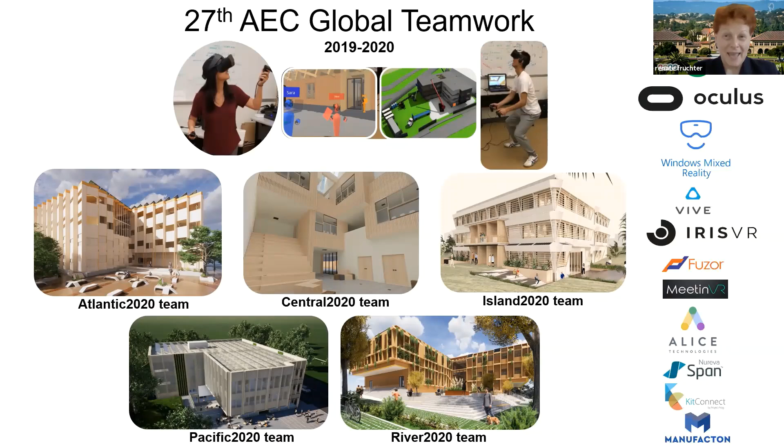Thank you, and hi everyone. Welcome to this presentation from us, as Renate said, Team Island. My name is Ronja, and I'm the architect of the team, joining from Aalborg University in Denmark.

Hello, everyone. My name is Simge. I'm studying at Stanford and originally from Turkey. I'm one of the construction managers of Team Island.

Hi, everyone. My name is Tian Long, and I'm also studying at Stanford University, and I'm one of the structural engineers in the team.

Hello, everyone. My name is Jakob. I'm from the Technical University of Denmark, and I'm a construction manager on this team. Hello, everyone, my name is Sebastian.

I'm one of the structural engineers. I am studying in Bauhaus University in Germany. Hello, everybody, I'm Nicolas. I'm the MEP engineer of Team Island, and I'm from ETH Zurich in Switzerland.

And this is our owner team, consisting of Paola, Hussein, Yuri, Miki, and of course, super owner Renate.

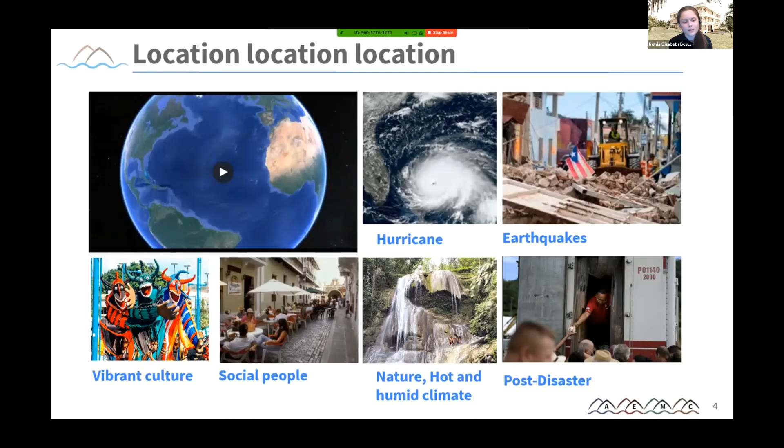We were asked to make a proposal for a faculty in San Juan, the capital of the Caribbean island, Puerto Rico. There were some key elements of our design: a tropical climate, outgoing and social people, being on an island which meant very limited access to materials, and lastly, natural hazards in the form of earthquakes and hurricanes, but also future risk of droughts.

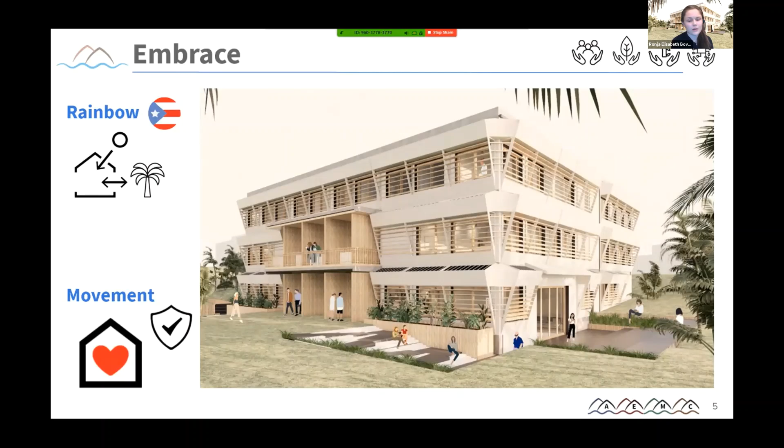All this we had to embrace, and of course also the challenges coming with it. And from this, our big idea, which is embrace.

We've designed a very open faculty with a large atrium in the center that would serve as a transition zone between the public and the private classrooms, but also to let light, air, and people move freely through the building. At the basement, we've implemented a living machine to invite nature into the building and blur the lines between interior and exterior in this naturally ventilated space.

Our way to embrace the Puerto Ricans was to design an open and modern faculty that doesn't only serve the students going here, but also the greater public. This is why we've located a cafe in the northern part of the building, very close to the main access and the road. So here you can get a coffee, and then go to the communal staircase and sit down and relax.

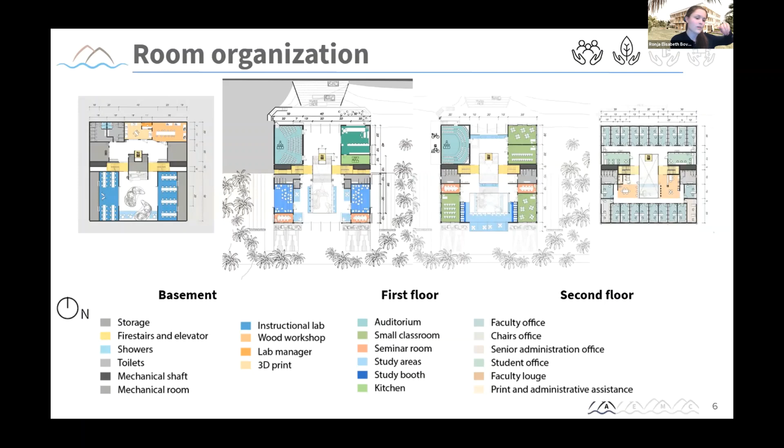My internet is slow, sorry.

On the ground floor, this is the very public floor. People are invited to pass through this atrium, and on the journey through the atrium, they can see what's going on above them and underneath them through the whole building, getting an idea of the life in the building.

We've also invited water into the building in the form of a human-made waterfall running down the glazed elevator in the center of the building. Lastly, you can see to the right that we have these two large classrooms that are openable towards the park, so that students can join the lectures both from the interior and the exterior.

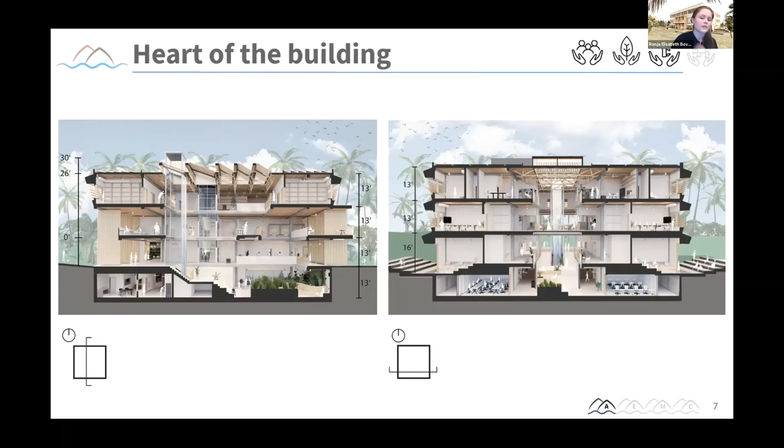In general, it's been a very important factor for us to create spaces for people to thrive in, and this is why we thought flexibility was a very important element. As you see, the smaller classrooms, for example, offer spaces for collaboration and lectures, and also workshops.

As I've already mentioned, we also introduced a makerspace to foster creativity and innovation. Here we have a wood workshop and also a 3D lab. This is not only offering students a place to try out prototypes, but also the general public a place to join workshops, for example.

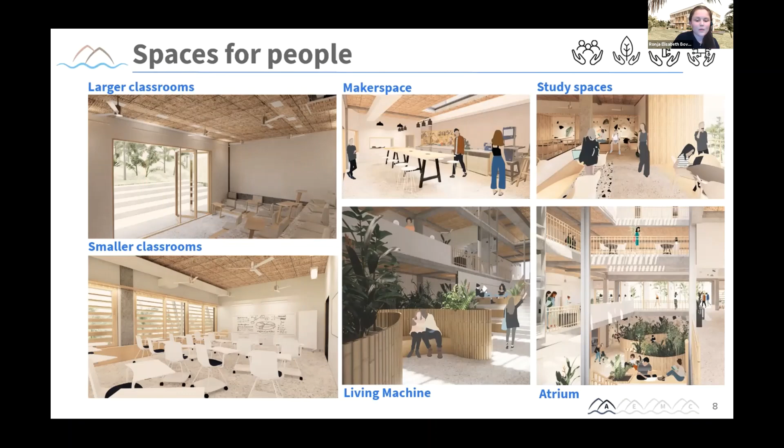The big atrium space also allows for strong buoyant airflow, which is very important since our most public open spaces are naturally ventilated. The enclosed workspaces, however, are mechanically ventilated and cooled.

For our HVAC system, we use small facade-integrated air handling units combined with ceiling fans. The system relies on an innovative comfort definition—high temperature and humidity, but with enhanced airspeed introduced by the fans. As most of the users of the building are engineering students, we showcase the integrated building systems and energy data.

And a ranking system to foster the conversation between them. For this, we created the concept of a frog race, with the goal to nudge students and faculty members to be more sustainable in their usage of the building. Every day, each room will enter a race for the most energy-efficient room, motivating users to adapt their behavior to beat other rooms, for example by utilizing less artificial light or wasting less water.

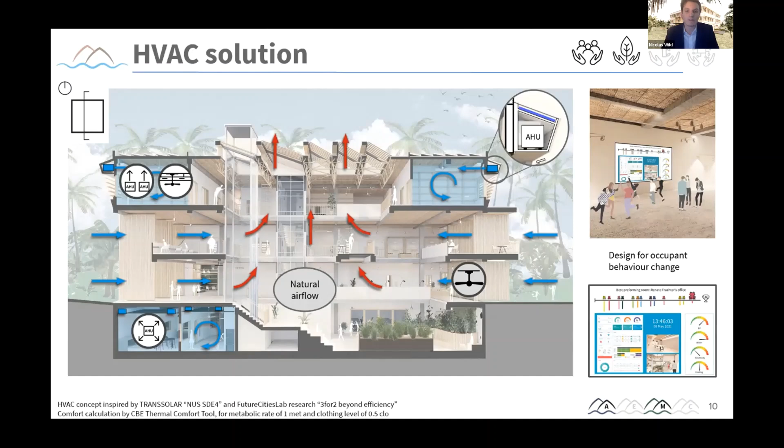We now want to explain how our building becomes net water and energy positive. On top of the roof construction, we have our PV systems whose power is stored in Tesla batteries. While part of the energy is used internally, we also provide energy to the power grid and to our integrated e-bike charging station. By this, we have a long-lasting impact on the greenhouse gas emissions of our whole surroundings.

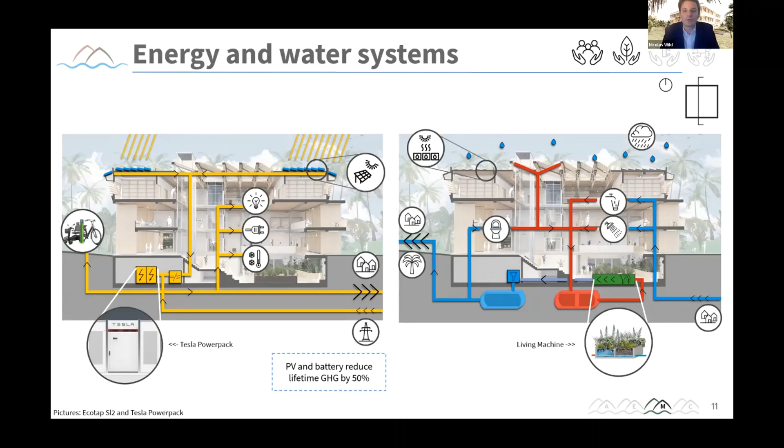The collected rainwater, as well as other wastewater from our building, is recycled with the help of our living machine system for reuse in non-potable applications, such as toilets. This allows us to serve other buildings with recycled water for toilet systems as well, minimizing water usage outside of our site. This water can also be used for landscaping, which will play a major part in future droughts, for example in conservation of the rare species of frogs or trees found on the site.

Now, knowing these spaces, structural engineers design a structure according to technical standards that can withstand the natural hazards typical of the island.

It's important to highlight that with the application of base isolation, the building is proven to be fully operational after strong earthquakes, as shown by nonlinear time history analysis.

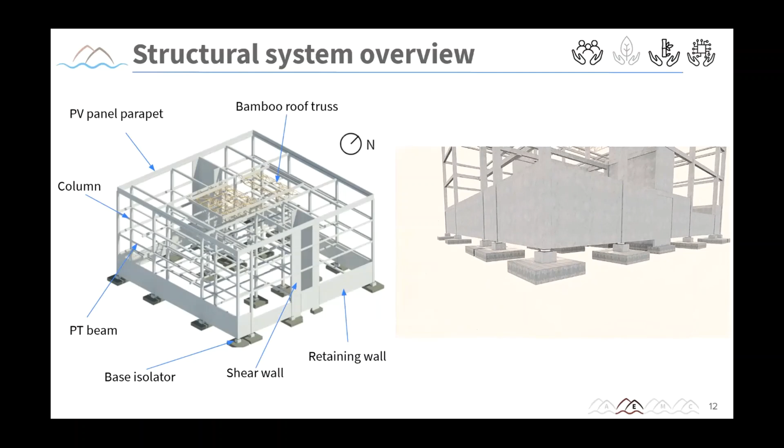Being on an island, material procurement and shipping is always challenging. However, the team found a way to utilize local material: bamboo. Non-structural elements such as partition walls and entrance doors were designed with bamboo. Structural elements like the roof truss were also parametrically designed with bamboo to give warmth and brightness to the whole ambience.

The animation at the top right corner shows how using bamboo contrasts with normal concrete beams and brings light to the building.

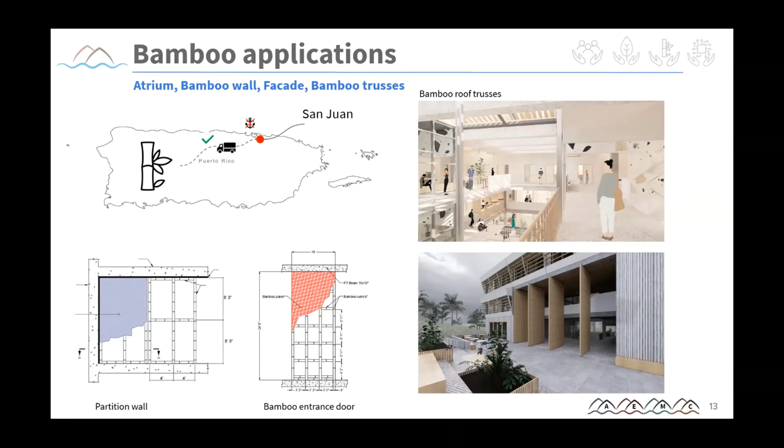Now for the facade, we also embrace local materials as a hazard response. For instance, the hurricanes and hot, sunny climate that Puerto Rico endures are addressed by creating space to include air handling units, louvers, and PV panels. The louver is made of bamboo to create a strong contrast to the visible concrete walls and to protect the glazing from projectiles.

Additionally, the sacrificial bamboo louvers are optimized for view and shading, and they can be prefabricated and easily assembled, which reduces cost in case of damage.

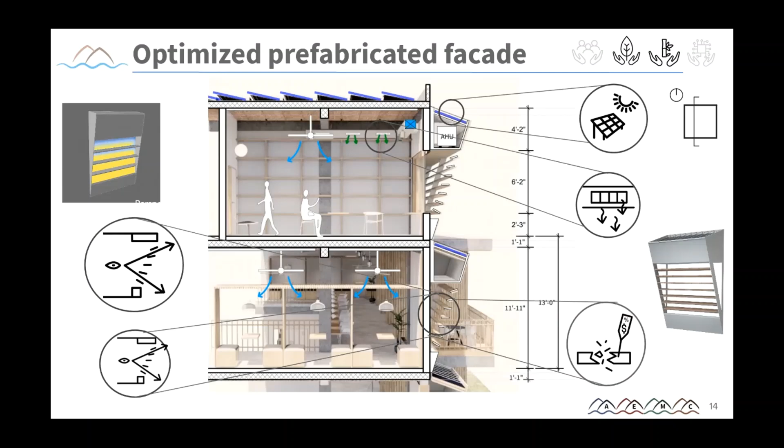Additionally, we seek for our building to go beyond its educational purpose and play an integral role in post-traumatic stress management and recovery of a population affected by natural disaster, serving as a relief site, supply depot, and communication center.

Besides hurricanes, earthquakes are another major concern. Just last Saturday, there was a magnitude 5.4 earthquake in Puerto Rico. Although earthquakes are difficult to predict, safety education should be emphasized prior to earthquake events. During an earthquake, base isolation helps minimize structural damage and keeps the building fully operational afterward. Then our building can help distribute necessary resources such as food, water, and electricity.

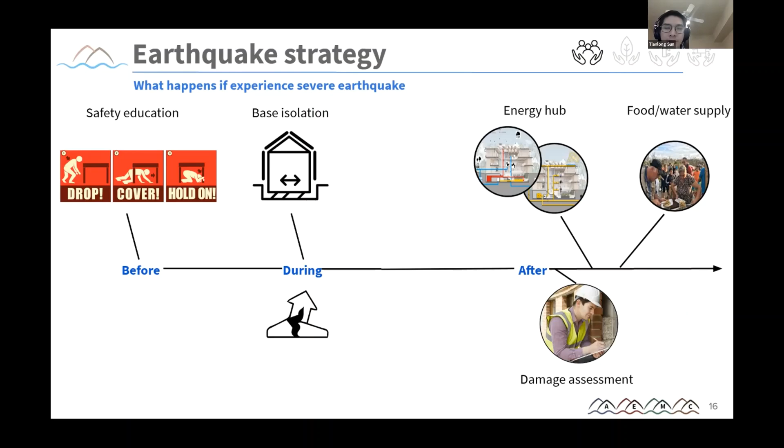Now it's time to plan how we build our design. To better plan our site work, we used simulation and virtually built our building. In this way, we could see bottlenecks and possible clashes that may occur on site, and optimize our 4D schedule by changing support relationships.

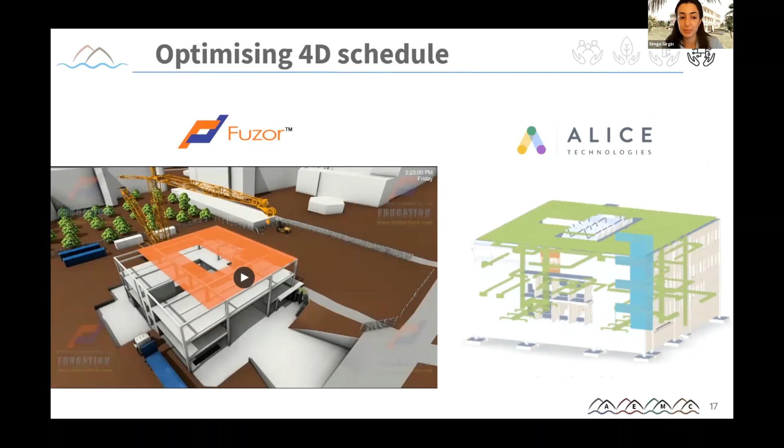On a critical day, such as peak workflow day, Fuzor simulation helped us coordinate construction crews and component shipments, which are essential for successful floor installation without colliding with on-site core wall construction. For example, we planned to install floor slabs in 3 zones to align installation with delivery frequency.

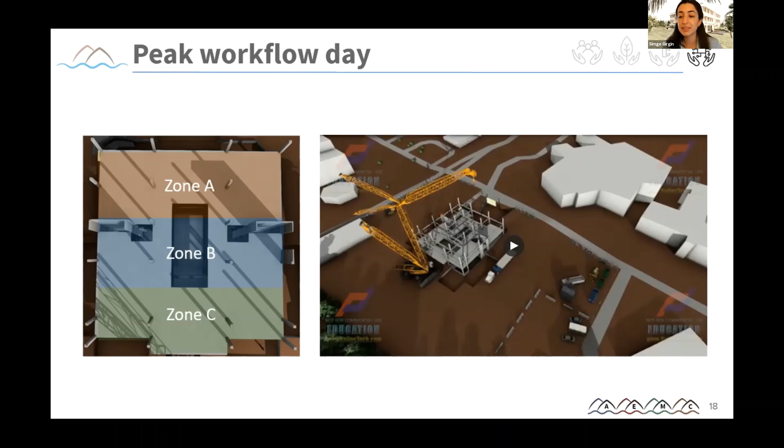Thanks to the Sustainable Target Value tool, our team was able to observe the evolution of greenhouse gas emissions, energy and water consumption of our building, generating different design ideas, such as implementing a living machine, battery systems, and bamboo as a construction element, which helped us reach all our targets very well.

We use target value design to meet all our target cost, which is $11 million, throughout different design decisions. With PV panel systems, base isolation, and integrated facade system, we got closer to our target, but still we are over by $1.5 million.

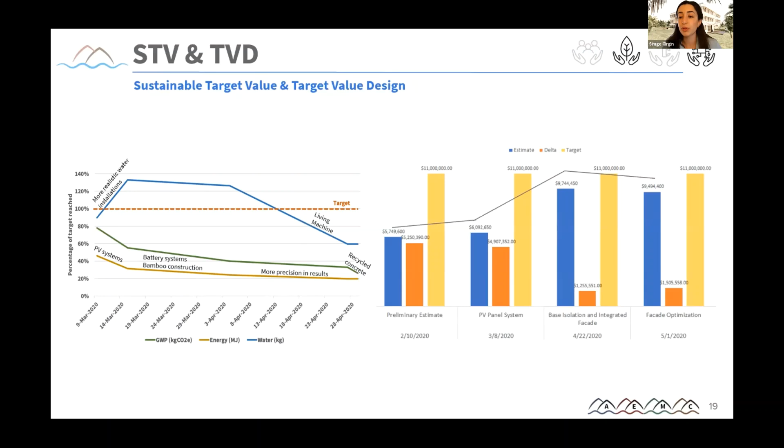Also, we believe that one of the key elements of successful construction is a highly integrated design team from day one. We use the data we collected through our project to determine patterns and specific behaviors that help in optimizing our communication to foster this interdisciplinary data exchange and collaboration.

As an example, we found common times of high responsiveness and started setting up office hours at exactly those times. Up to implementation of them, together with clear standards, protocols, team member preferences, and work profiles, our mutual trust and understanding grows, which led not only to more efficient collaboration, but also an overall stronger project.

The tracking of information became easier because everything was stored in a central environment, meaning all decisions and discussions could be found easily. We observed the change in team dynamics in our virtual reality use as well. Throughout the project, we leveraged VR from weekly to daily use, and therefore, we became a more integrated team.

So, to summarize all the challenges, we are starting with the IT challenge, where our goal was to enhance our interdisciplinary team collaboration, while also optimizing our project, and we would integrate the future user in a responsive way.

We achieved this by doing an extensive data analysis to allow for a better understanding of our team dynamics. This data was simultaneously used to keep track of our decisions for more dynamic time-responsive risk analysis.

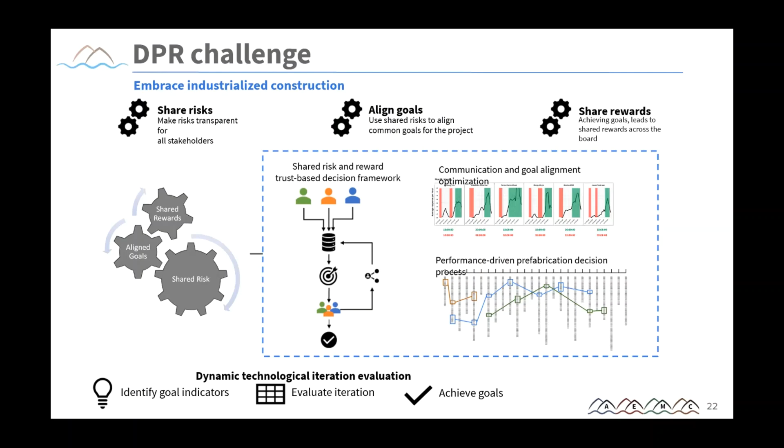Furthermore, this helps us define design iterations evolved over time using a performance-driven prefabrication decision process, with indicators based on mitigating risk in a way to achieve shared rewards.

To summarize our solutions to the resilience challenge, we would like to categorize it under 2 topics: the building during normal operation, and then extreme hazard events.

The big challenges we faced during normal operation were tackled with innovative approaches such as introducing bamboo as a construction material, but also achieving a net positive water and energy system and the promotion of sustainable mobility.

Furthermore, we aim to educate occupants through IT systems towards more sustainable behavior, and by adding a workshop, we will play a role for long-lasting impact on the community.

Our challenges under extreme hazards such as hurricanes and earthquakes, as well as future droughts, were addressed by the detailed design of the facade and structural systems, but also self-sufficient water and energy systems.